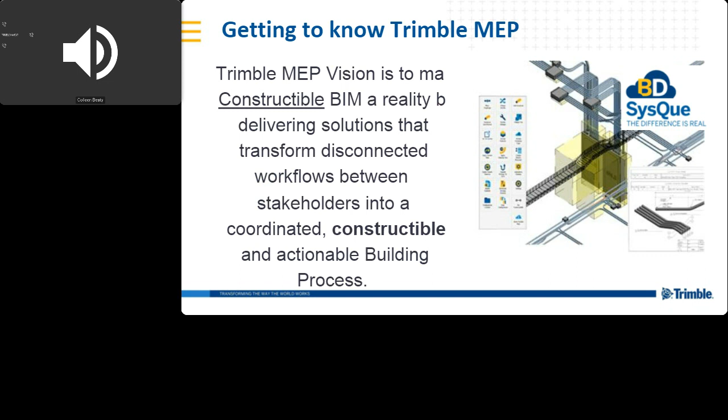Now, the challenges electrical contractors are encountering this year are beyond anything we've seen before. Obviously, a lot of remote working has gone into place, having connectivity to their offices and sharing information, needing to be able to access this anytime. Cash flow is obviously a concern in any year, but especially in the uncertain times that we're in. These are the elements that we're going to be speaking about today, trying to help you ascertain these issues as well as provide a solution to these issues.

Now, the challenge of on-premise software. On-premise software keeps us limited in accessibility. It's not as mobile as we'd like in this day and age. It limits our ability to collaborate, which is one of the biggest elements of cost. If I ask any contractor to put their thumb on the most costly topic to their business and profitability, it's going to be lack of communication and collaboration. It also puts a high demand on IT resources, the cost of the hardware, and it even provides an uncertainty of how readily available that information is going to be at a time of need.

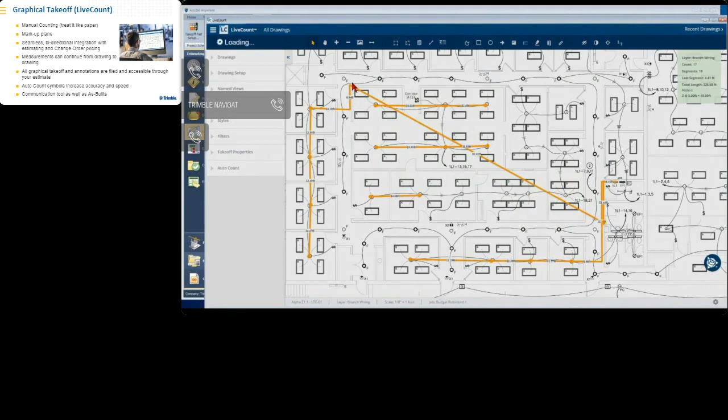If I come back to the drawing and I make an alteration to any of this information, I change my mind or I change the pathway, as soon as I release that, the software's now changed that value in my estimate. If I move it to another direction, it's changed that value in my estimate. In other words, I can see a live impact of all these decisions that I'm now making in correspondence to this design in a value, so that I can make that economic decision, not just a convenience decision in our day-to-day.

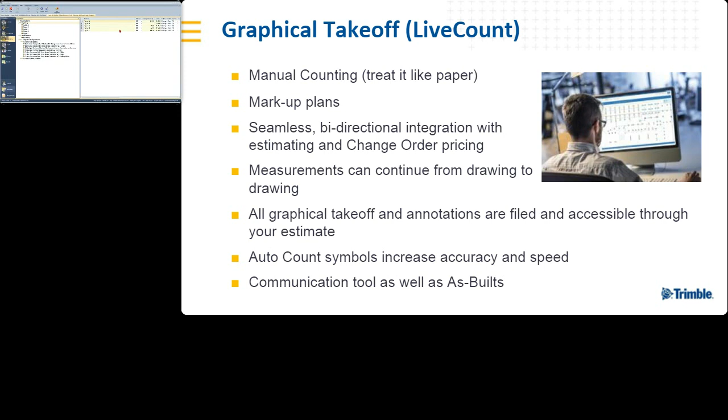Now here we're going to do some fixture counts. So I'm going to go back to that fixture designation that we created, and that automatically created a unique takeoff pad for this job with my fixtures. There's our type E that we just created a moment ago. So I'm going to go to my type E fixture. I'm going to select that. It's going to take me over to the drawing and allow me to quantify those. Type E.

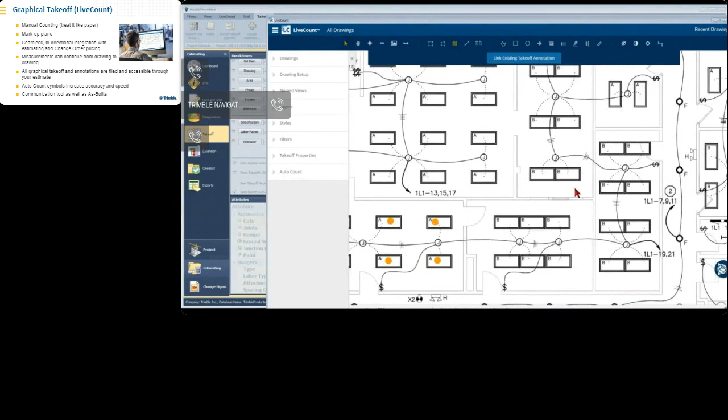Now, like I said, I can go around and I can manually select these objects by simply finding the object and clicking on it, no different than I would in a paper environment. When I'm done with that, I'll tell the software I'm finished, and now you'll see a quantity of 8 that I'd already taken off, and then these new 4 that we've taken off.

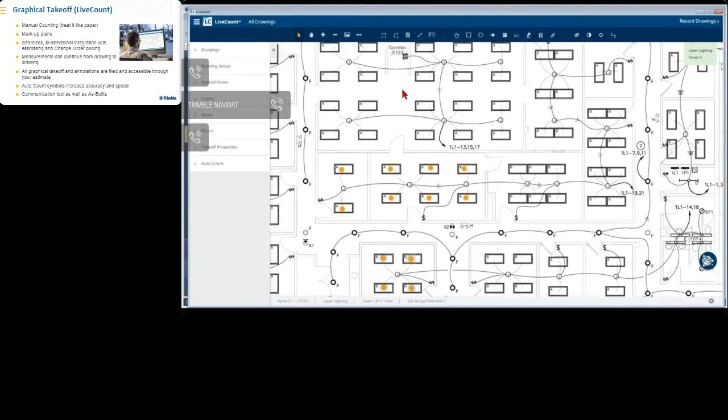Another method of using this solution is to have the software do an auto count. So instead of me running around doing all that clicking, hunting, and finding those subject matters, I can literally grab a sample off the drawing and tell the software I want to look for different rotations. I can tune it to the drawing, so if I have dirtier drawings or more congested drawings, I can tune it to that particular drawing. And over here in the background, you can see that the software's already started taking off, and it's going to locate all those 2x4 fixtures. So as I found those 2x4 fixtures, it's telling me exactly how many are left to get quantified in the project.

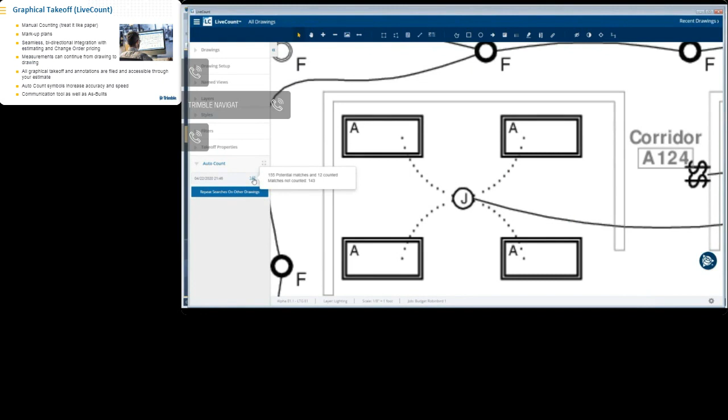So if I select that, you'll see that there were 155 potential matches, but it noticed that I'd already counted 12, so there's only 143 remaining. If I want to confirm that, I'll ask the software to present those out on the drawing, so I can zoom out and confirm that not only did it find the remaining 2x4s, but it was also smart enough to locate but not put them in the add quantity of green to my estimate.

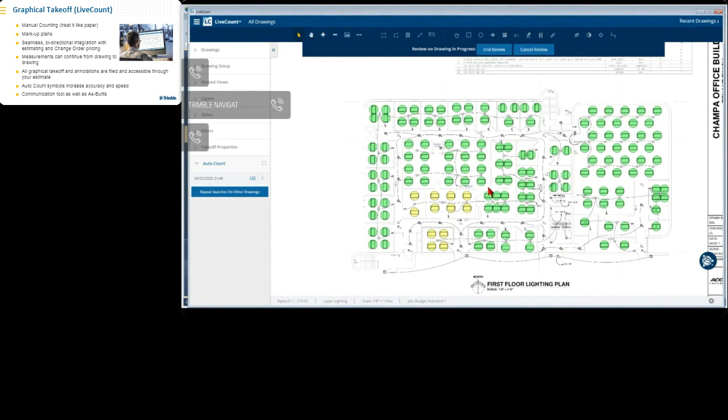If I zoom in, you'll notice that there's a mixed bag of A and B fixtures here. So I need to teach the software the difference between the two, because in the first pass, it's looking for that object shape. In the second, and this is a patented process with our solution, I can come in here and say, now that you found all the 2x4s, I'd like you to do a secondary pass over those and isolate the A's. I'll do the same thing with the next fixture type, being the B.

Confirming that there's no other types, I can close that down, and you'll notice over on the left-hand side, the software's now taking that gross quantity, and it's now breaking and isolating the A's from the B fixtures. Now that I've taught it that, it now knows everything it needs to know to go and quantify these 2x4 fixtures and to isolate A's and B fixtures from one another.

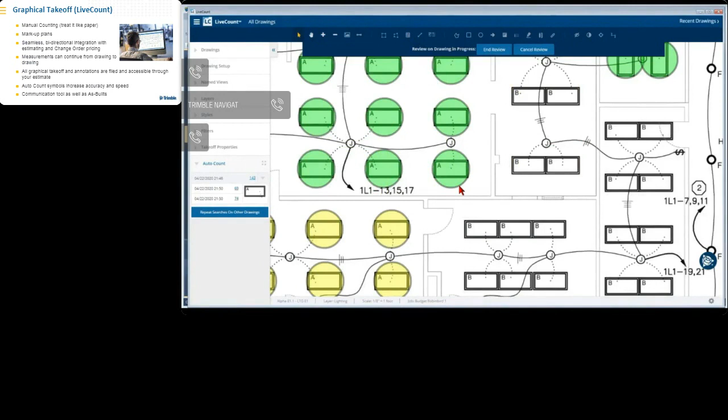So if you notice there on the bar at the bottom, I can then select that, and I can say, please, repeat this process on all these remaining drawings. And quite frankly, I can turn my back, or I can go taking off another subject matter, and I know that the software is going to quantify and separate those for me and have those quantities ready for when I get to that drawing. I can import into my estimate and have that work done. It's quite a time saver. But it's not just a benefit of a time saver.

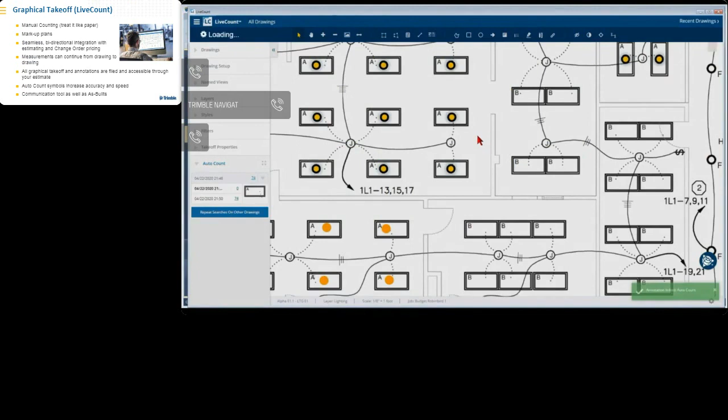There's an awful lot of times where I'm going to use this to search drawings and look for things. I can download all the drawings on a project. So if I have the mechanical drawings, architectural drawings, I'm looking for a subject matter that's on my electrical drawing, but I don't know where this motor is that I have to run a circuit to make sure I've got power to this motor. All I've got is a motor schedule on my electrical drawings. I can do the same type of search by giving the software the name and telling it to go out and search for that, not just on this drawing, but maybe on drawings I'm not commonly using.

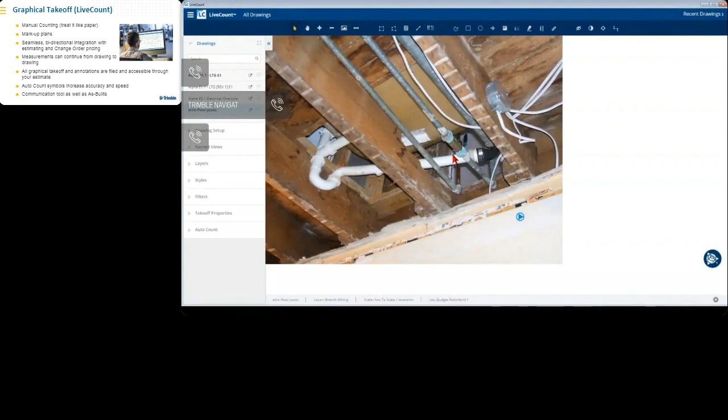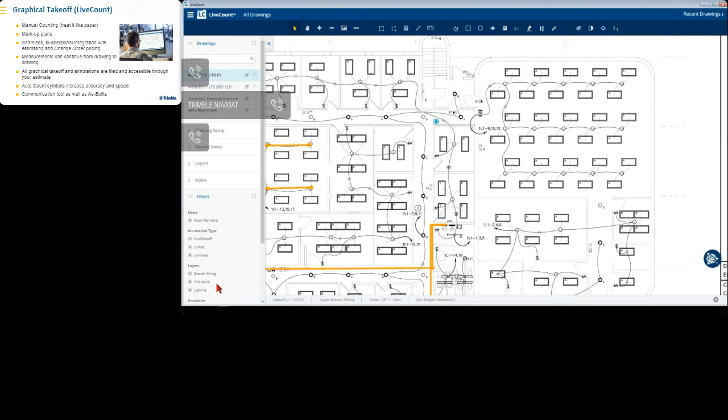Now when I have time to come to the drawing, I can come here, I can see that icon, we can get on a phone conversation, I can literally look at what the user's trying to explain to me, this problem. This provides not only, like I said, better communication, but imagine how strong your as-built would get by providing this information as well. Showing information that's up above that ceiling or where that information is. So when I do this, I can filter that out. I don't have to print this drawing with those notes or those images on them. I can organize all this.

I can even have filters that separate users. So if I have multiple users looking at the same drawing at the same time doing takeoff, I can turn the filter onto just what I'm doing, so that I'm not getting caught like a cat in front of a fishbowl, mesmerized by what my partner's doing on their job. I can focus on what I'm doing, and yet I can turn that filter off and make sure that we haven't missed anything or we haven't double counted anything.

Now we're going to talk a little bit about the extension, where the material comes to a head and where we're going to solicit that information with our purchasing power through trade service. Then we're going to talk a little bit about the change management, and we're going to try to do this a little bit quick here. We are running tight on time. In change management, you're going to see that in the project, I can go down and I can focus just in the change pricing of that project. We've already talked about the estimating, the bar in between.